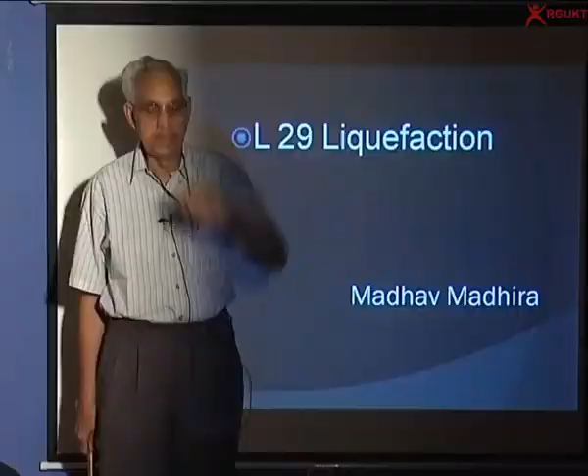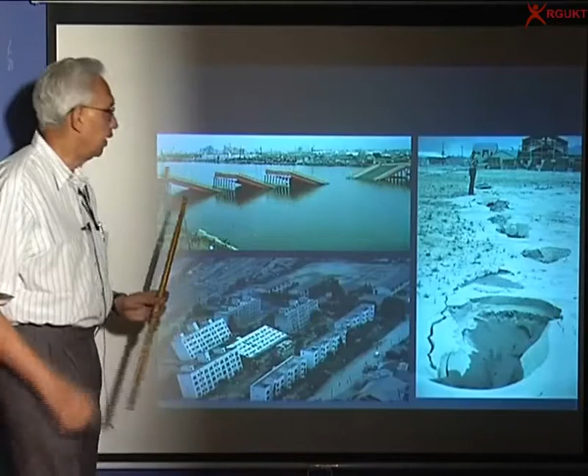Let us see one of the most critical phenomena that happens during earthquakes, liquefaction, where the ground becomes liquid. And this is how it affects. You can see because of the ground shaking, the decks have fallen into the river. A building which is intact, but the ground became a liquid, so the building got tilted. This happened in Japan in 1964.

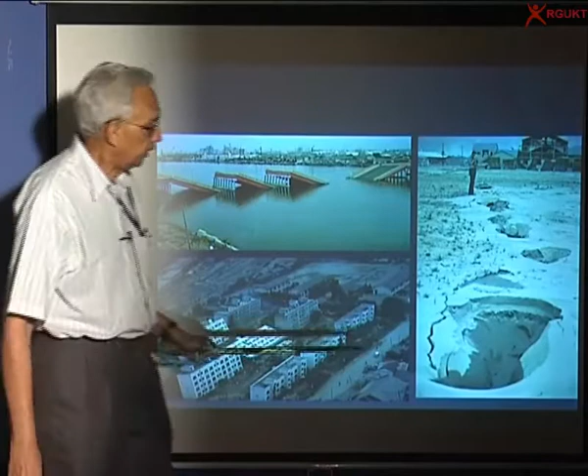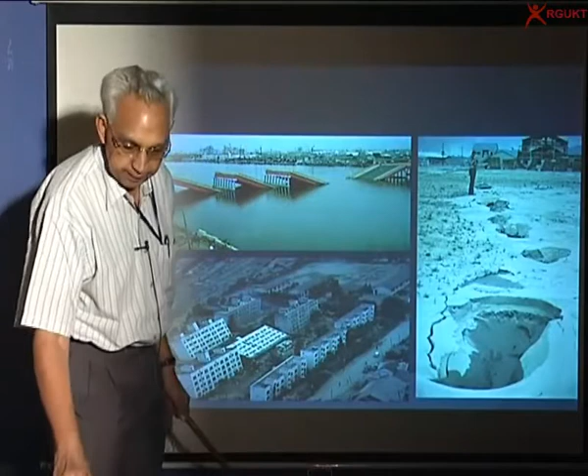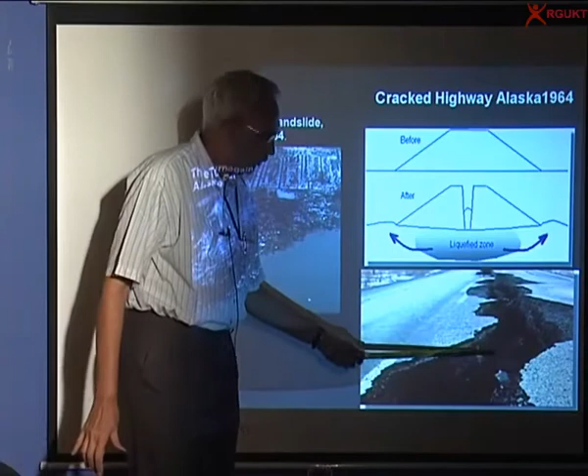And this is the kind of crater that formed because of liquefaction. The whole ground becomes like a liquid, and you get all these collapses that are taking place. And you can see this is another major earthquake where so much water came, slope failures. The ground shakes so much, you get craters, ground separating.

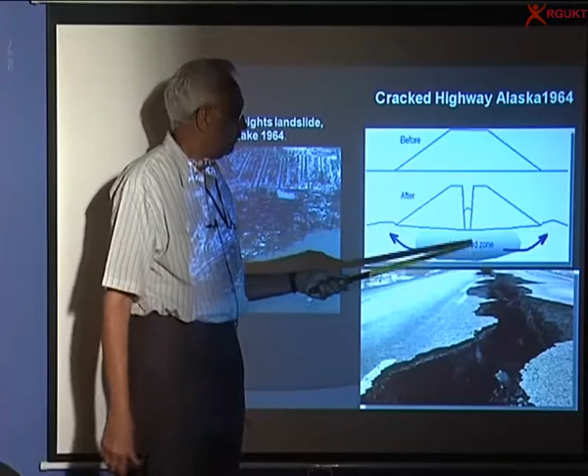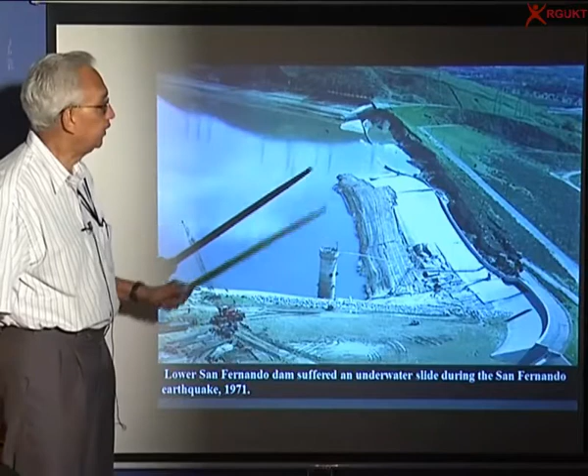And the soil here became a liquid, and the dam or embankment, which was standing very safely before the earthquake, because on a liquefied zone it cannot be stable, cracked, and this was the highway in Alaska. And you can see a dam failed. This is San Fernando Dam, which could not take the forces due to the earthquake.

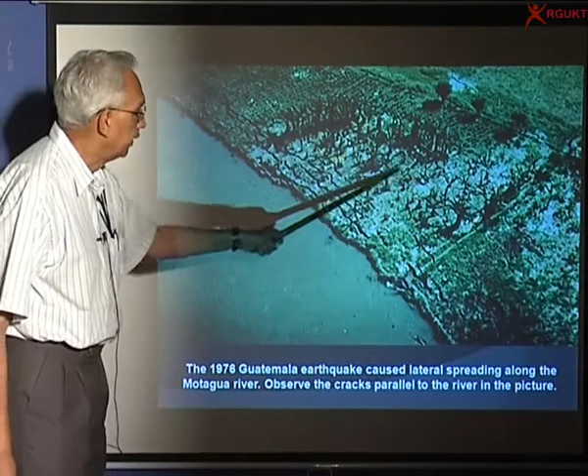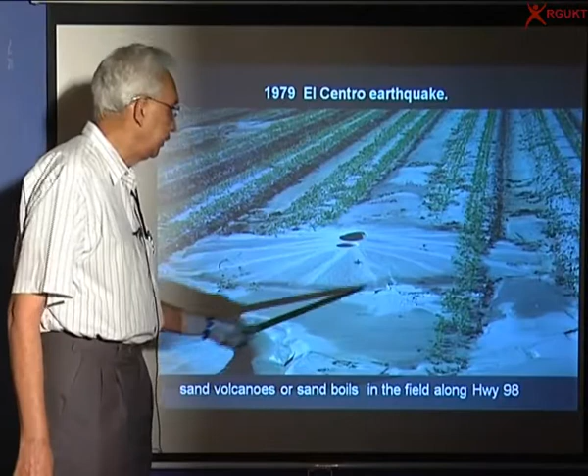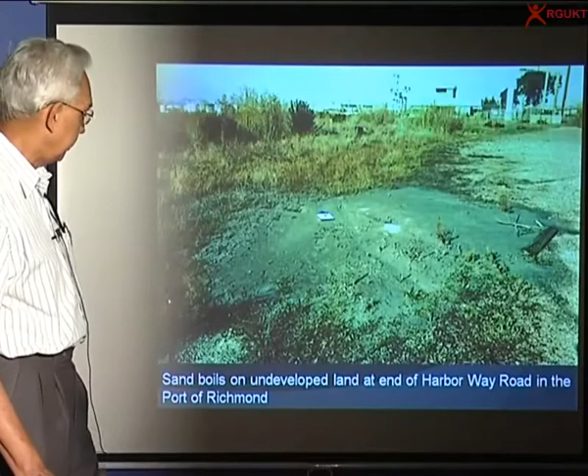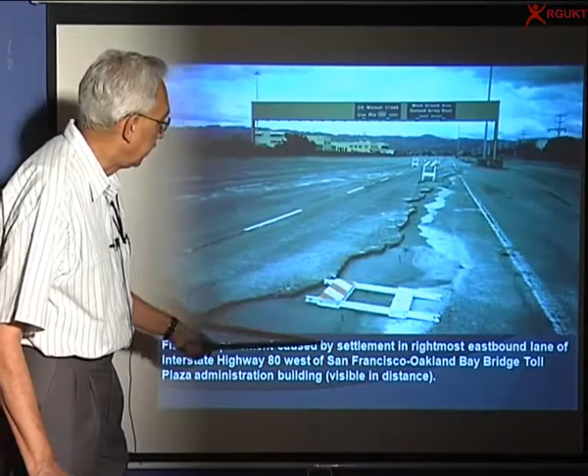This is the road in another part of California, San Francisco Oakland Bay Bridge. This is a little later, and the highway, you can see how it cracked, and all the soil came from below the water, etc. This is the Loma Prieta earthquake in 1989, and this kind of damage in front of the bridge.

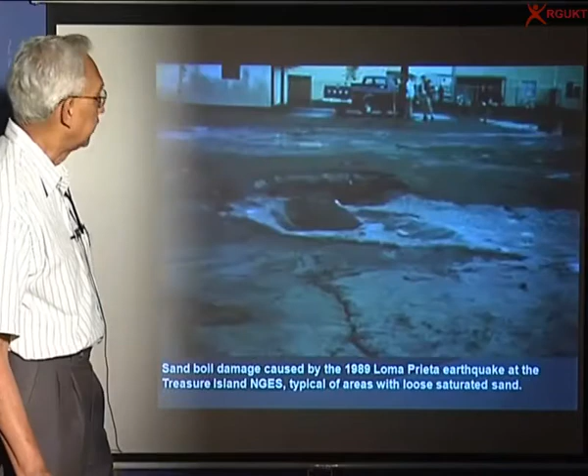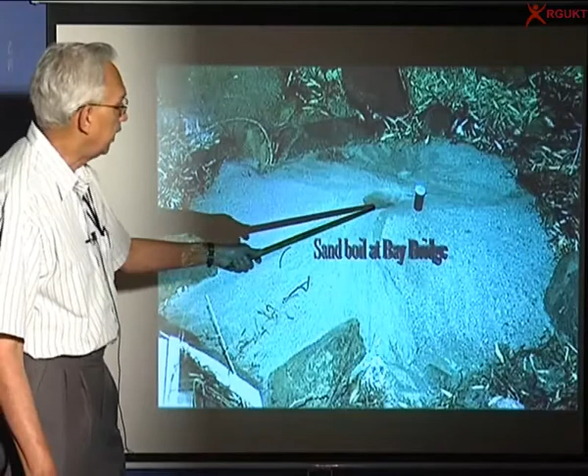Some more pictures, and here is the liquefied zone. Craters formed because the whole thing collapses. This is the sand boil. When you see the picture, it comes like it's boiling and coming out from there.

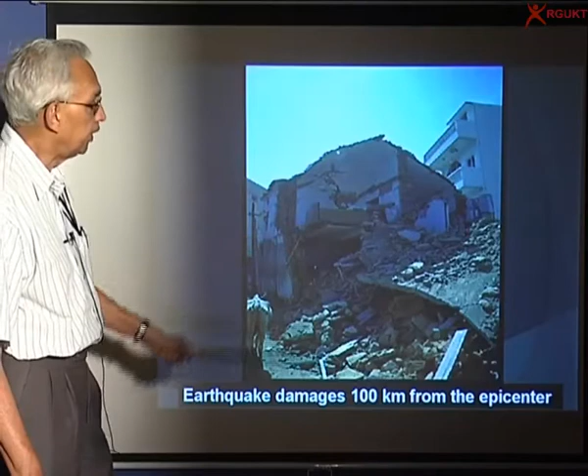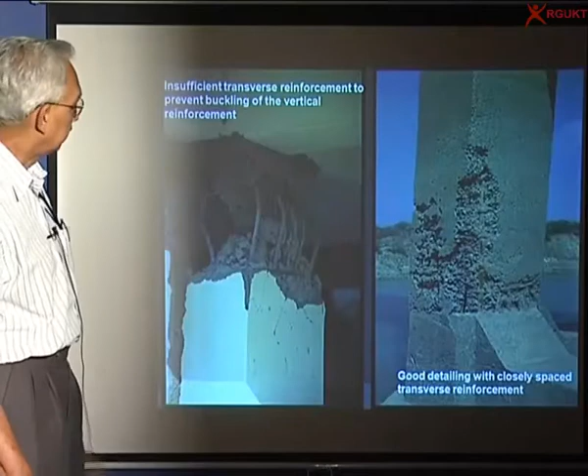This is our Bhuj earthquake, and the kind of damage 100 km from the epicenter. Even here, this is what happened in Ahmedabad. A lot of buildings collapsed. This is what happened to traditional masonry walls. You find the collapse here too. There was no reinforcement, so even the beams and columns failed. This was okay because the transverse reinforcement was good.

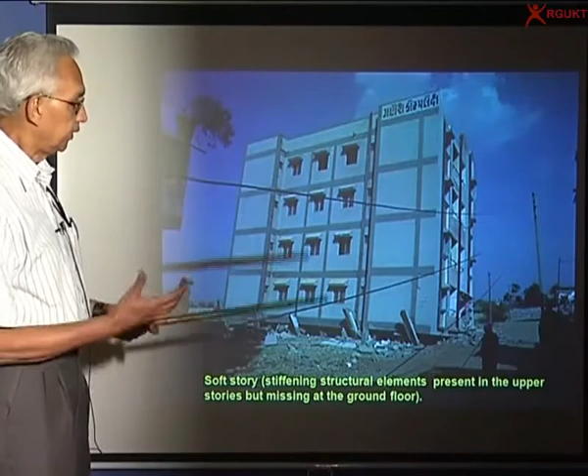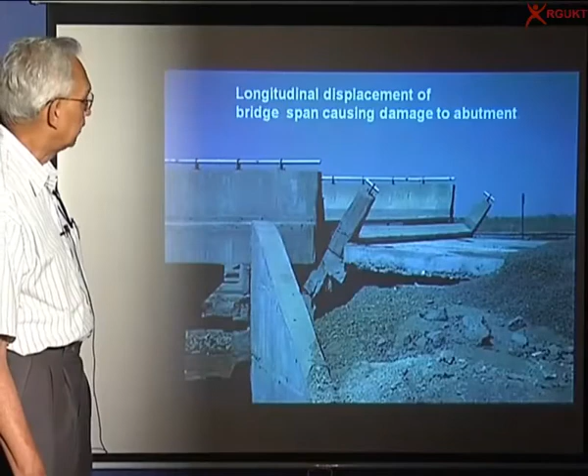This whole basement sank into the ground. It's amazing. There was a multi-storied building with what they call stilts, so that you can park your cars here. And because the ground failed, the columns also failed, and the building came down. And this is what happened to a soft story. This is the roof collapse, and this is the longitudinal displacement, and the bridge completely moved away.

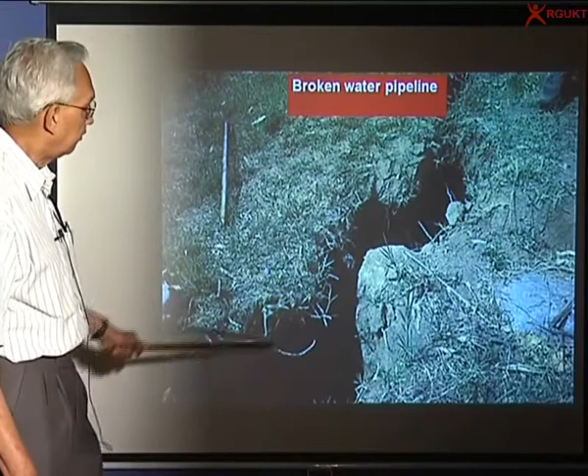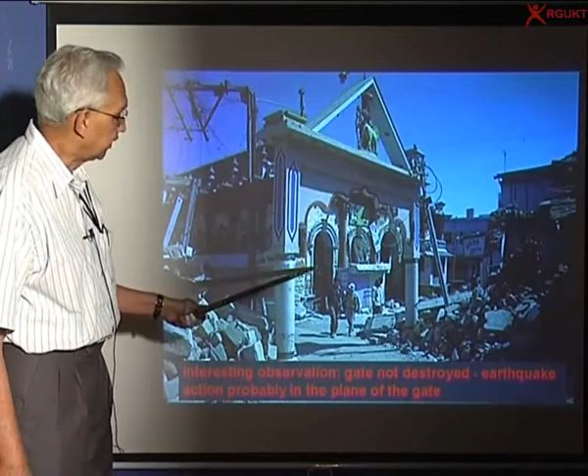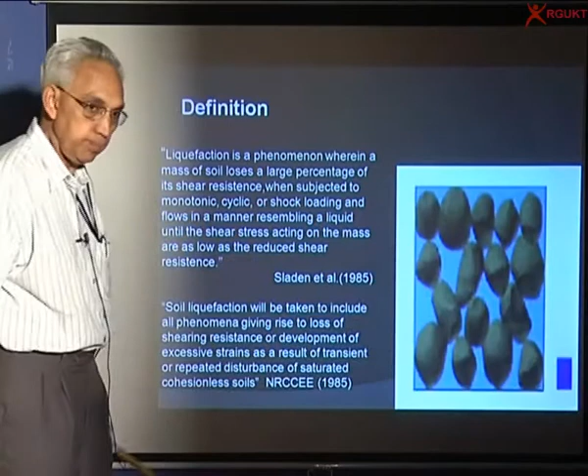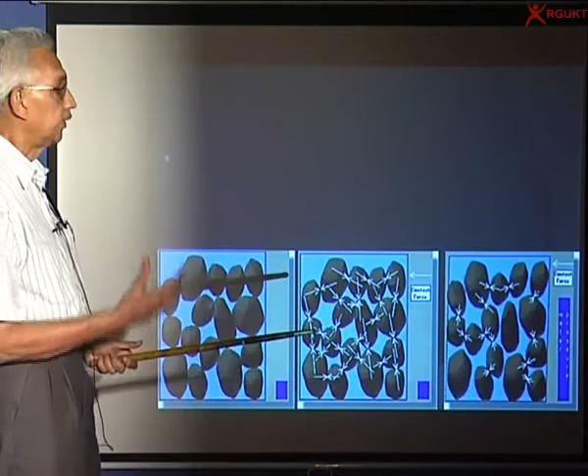What happens is you have this loose sand which is fully saturated. When you shake it, the particles try to separate out and the contact area is lost. Then they try to repack. But the whole thing happens in about 20 seconds. So for those 20 seconds, the whole thing behaves like a liquid because the particle contacts are lost. You can see here there are no particle contacts, and that is why it happens.

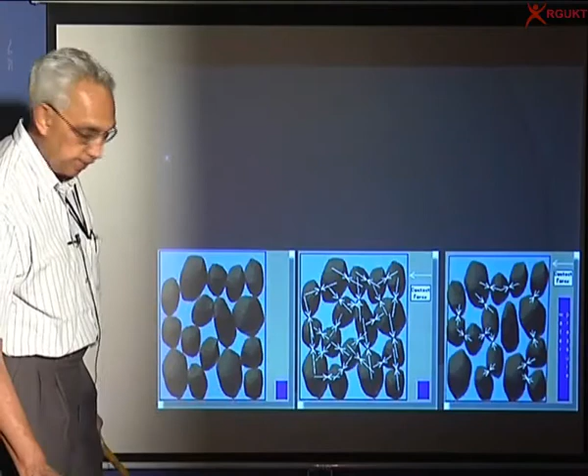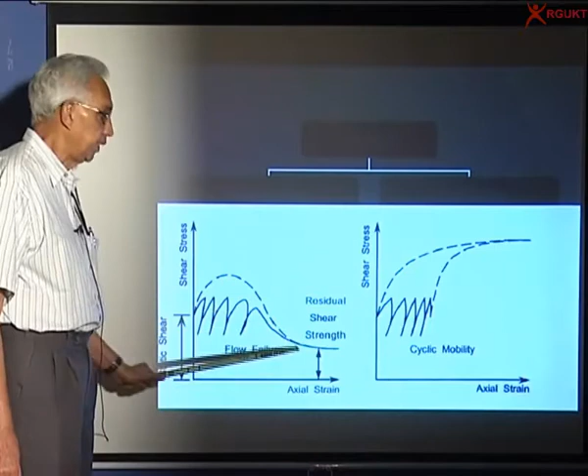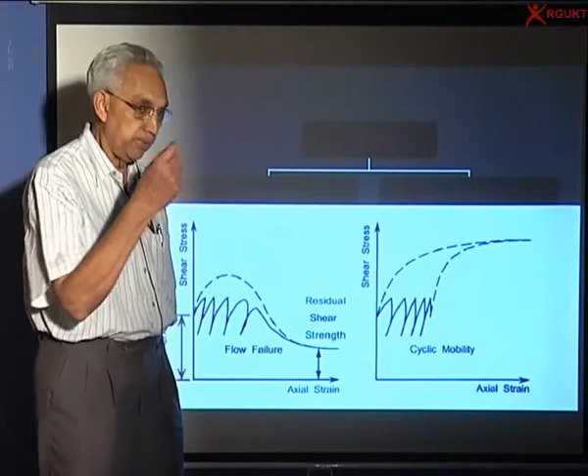So we look at two possible situations. This is residual shear strength, very low. Initially it's fairly high, it becomes pretty low, and then you get complete liquefaction. Whereas here the stress is reached after large strain, so we call it cyclic mobility. So when you are doing a shear test, you have to apply a number of cycles of loading and unloading and find out when these two phenomena occur. That's how we use the cyclic triaxial test to determine the liquefaction potential.